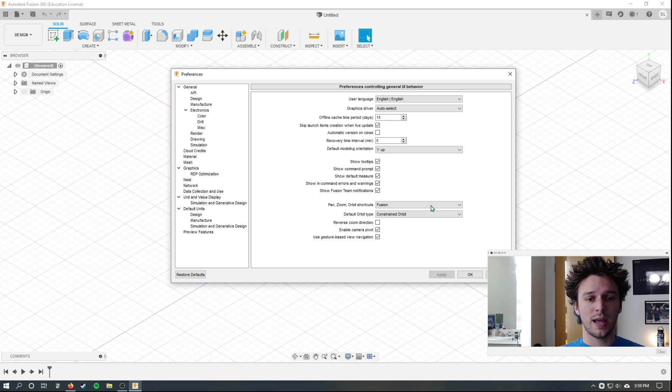It's really easy. In case you aren't logged in, or if you're on a shared computer, you can go up to this button at the top right, and that is where you can sign out and then sign into your correct account. And also preferences are from that button as well. This is where you can set things like your default modeling orientation, the type of orbit you like, your shortcuts, anything like that. But just in case you need those, that's where you'll find them.

So what we're going to do is we're going to create a crank with generative design. And generative design is really interesting because it uses reiterations of AI software to create a model. And so the way that it does that is it uses constraints and preserve geometries and obstacle geometries. And those are how you define what you want to keep in it and what you don't want it to kind of grow into. You can kind of think of it like vines creeping along.

And they're going to grow and create a path that is both strong and lightweight, and you're preserving materials, and you can change it based off of the material type you're using. You can put different types of loads on it. There's a lot you can do, and we're going to be exploring all of that.

But the most important thing about it is that it is unpredictable. And so that is why we are going to be very careful when we're setting it up, because you can get results that you are not expecting, but technically may be correct, but they aren't exactly what you want.

So the very first thing we're going to do is just create some bodies in Fusion, which are going to be our obstacle and preserve geometries. And basically what that means is we're going to create the stuff that we tell the AI, I want this kind of form to be in the final generative design, or I do not want it to go into this

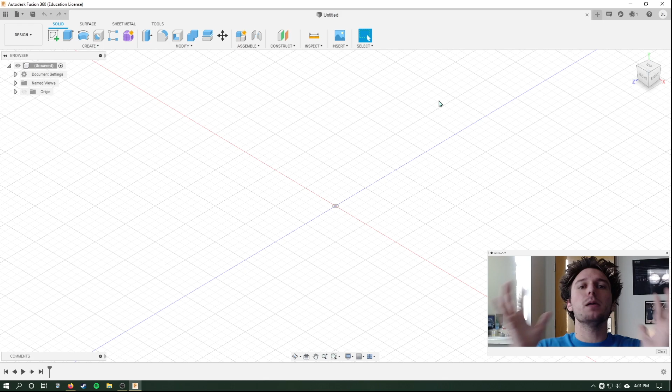And so we're going to be creating a simple square drive crank. And this is completely arbitrary, it's not being used for anything, but this crank is something that we are going to just define the bare minimum of, essentially. And then we're going to let the generative design do its thing, and then it's going to create this kind of finished product for us.

And so the first thing we're going to do is we're going to open up our data panel with this button, and this is where you're going to see all your different projects. And so you're going to go ahead and click this blue new project button, and you're going to type in a name for this. So it could be generative design tutorial, it could be a class name, it could be whatever you really want.

But since I already have a generative design tutorial, I'm going to go ahead and go into there. I'm going to close that panel so we're inside there, and then I'm going to hit this button and new design. And realistically, we don't have to do that because we already had that tab open, but it's just in case you accidentally clicked any buttons, whatever it may be.

So we are looking at our blank workspace, and in this area you can see the layout grid. If you don't see it, you can go down to here, which is the grid and shapes button, and you can turn on the layout grid with this check mark. I like to have it on when I'm starting at the beginning.

I might turn it off later, but I like to start with it because otherwise, when I'm just looking at it like this, I cannot figure out what I'm looking at. It's just blank. And so this layout grid lets me orbit around and get some sense of where I am in space. And we're going to use the view cube up here to return to our home view, which is just a nice isometric view.

So if you are orbiting and you're not exactly sure why it's getting all spinny, see, like this is getting all angled, that may be because you have the constrained orbit off or on. And so we're going to go ahead and switch that to constrained orbit, and we're going to go back to our home. And now as I'm orbiting around, you can see it kind of keeps a vertical, almost. And so that's just for, I guess, sanity.

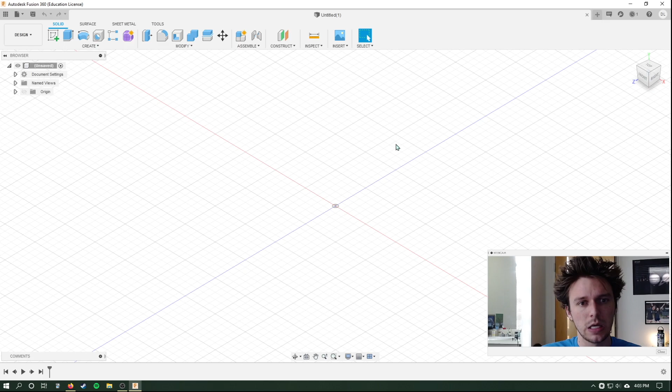But once I turn off the grid, usually later in design, I might turn off that constrained orbit, so that way it's a little bit more freeform and I can get to places that I want really easily. Just some things to keep in mind.

So the very first thing we're going to do is we're going to define a sketch, just like in any CAD software. And so to do that, we're going to go up to the ribbon at the top here, and we're going to click the new sketch button. And we're going to do this on the top plane. And we are going to create basically the crank interface. As I said before, this is a square drive crank.

And so we're going to create that square drive. We're going to click on this top plane right here, and you can see the coordinates with the top. So now we're looking at the origin of the top right here.

The very first thing I'm going to do is create a square, because this is a square drive crank. But I don't want to do a 2-point rectangle, because that's defined by 2 outer edges. Instead, I'm going to do a center rectangle, so we'll click on the create dropdown, go down to rectangle, and do center rectangle.

Now if we just hover, you can see it gives a tooltip which says place center point. So we're going to go ahead and click on the origin right there, and we're just going to type in the dimensions that we want.

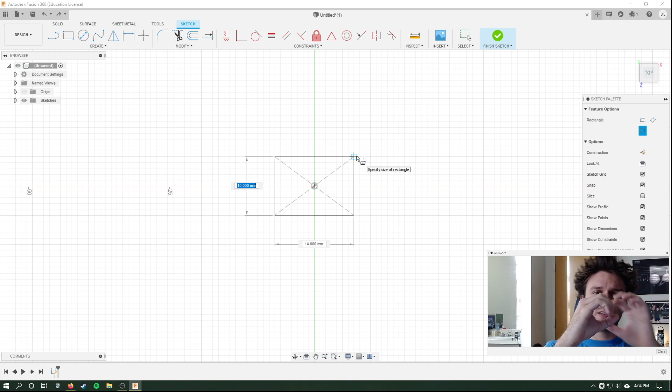However, what we're going to define this as is, we're going to imagine this is being milled from some 10mm stock. So some round stock like that is 10mm in diameter. We don't exactly know what that diameter is based off the height and width of the square, so we're just going to click arbitrarily.

And then what we're going to do is create a circle from the center point circle tool, which is just the default right there. This is where we're going to define that 10mm diameter. So let's go ahead and type in 10, okay?

And so now we want this square to kind of fit inside that circle. We want it to be inscribed in it. So what we're going to do is just drag one of those corners so it kind of fits in there.

And then all we need to do is click on this point, we're going to click coincident and click the circle, like that. And then we're going to do it with this one as well. Actually, that's over constraining, so we're not going to do that.

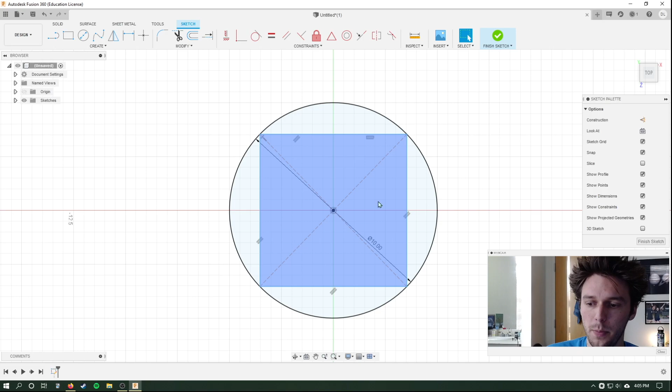But what we are going to do is, you can see that this isn't even — it's not defined as a square. So while, yes, the point is constrained to the outside of the circle, it's not considered a square, it's still a rectangle. So to do that, we're going to get an equal constraint, and we're going to click on the top and left edges of that rectangle, and now it is constrained as a square.

And you know it's fully constrained because it's now black, and if we try and drag on it, it doesn't move because it's locked. So we're going to go ahead and finish this sketch. And now that we've finished it, we can check in the sketch panel, and you can see it has a little lock icon right next to it. That means it is fully constrained, so that is a locked drawing. It's not going to just randomly change or confuse us, anything like that.

Let's go ahead and go back to home, and you can see this is our isometric view. And what we're going to do is extrude — you can either click this button, or click E, or click Q, which is the press pull tool, kind of an all-purpose tool. It doesn't really matter.

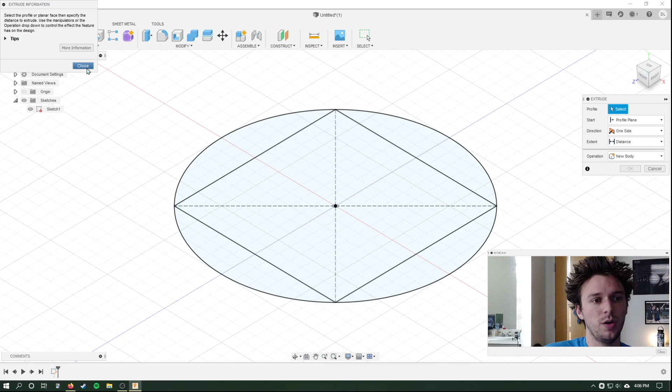So I'm going to hit E on my keyboard, and I'm going to hover over the square. You can see we can hover over some of these semi-lunar areas, but we're going to hover over the square, and we are going to extrude this by 10 millimeters. We're setting this operation to new body, and we're going to hit OK.

Let's go ahead, zoom out, and orbit around. You can see we have extruded this up 10 millimeters. So now let's go ahead and drop open our bodies in the tree over here, and let's rename this, because this is the start of our square drive. So let's rename this square drive, so we can keep track of it. Okay, so we've got our square drive.

And now we are going to create a revolve. This is kind of the plate that the crank itself is going to attach to, so it's the crank arm that we are going to use in the generative design. We are defining this preserved geometry, which is the plate that will interface.

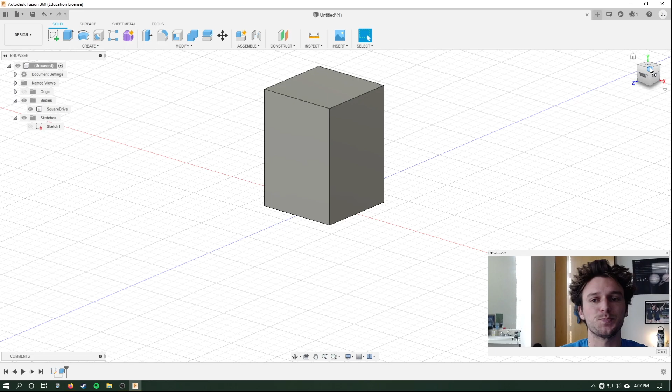It has that square drive, and it's also where we're going to bolt the arm for the radius of our crank. Let's go to create sketch, and we're going to create that plate on top of this square drive, from the front plane. You can see as we're hovering, it's highlighting this plane of the body we created. If you click and hold, you can say I want XY. So now we're creating a sketch on the XY, which is the front plane right here, XY front.

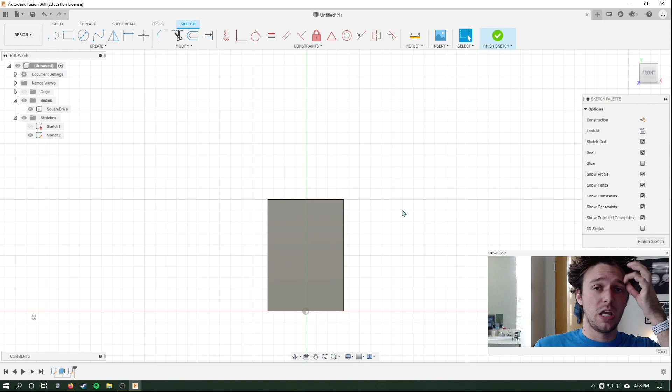So we're creating a sketch on the front plane, and the first thing we're going to do is, remember we're creating this from round stock, and we're kind of squaring off the end of the round stock. That may be something that's just given to us, like a supervisor says this is where it's going to be interfacing with whatever machine we're making, who knows.

But they're defining it as a 10 millimeter round stock. We already defined that circle as 10 millimeters, so we're going to recreate that in this sketch plane. To easily do that, we're going to project one of these edges in here. We'll hit P on our keyboard, or go to the Create dropdown, down to Project Include, and hit Project. We click that edge and create a projection link, which means it's going to continuously keep that there, and hit OK.

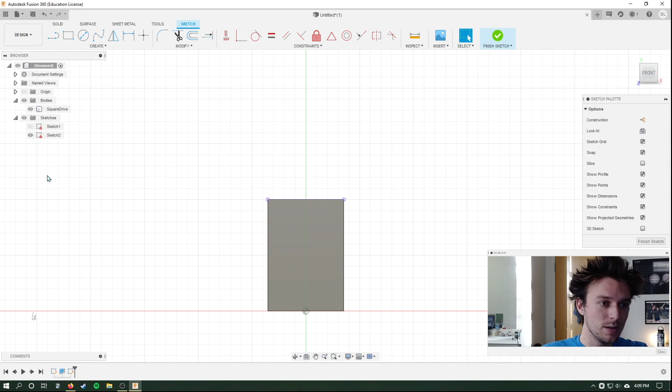So now you can see we've got this kind of purple line right there, and we can turn off the body if we want. You can see that line is now in our sketch plane.

Now we're going to go ahead and create a rectangle, and we want to do this as a construction because we're just referencing this. We don't want it to get in the way of our drawing of our actual sketch bodies. To do that, we hit X on our keyboard, and now I'm going to create my square, which we're just going to arbitrarily start from that point and then drag it somewhere. We'll use that coincident constraint to make this point coincident with that point. However, you can see it's not constrained yet because this is still orange, which means it's movable. So to create this as a full square, we're going to go back to that equal constraint and click these two edges, and now it's a nice square.

Then we're going to create a circle that encompasses that, because we want to grab that outer edge of the circle as our round stock. To do that, we're not going to do a center point circle. Instead, we're going to do a 3-point circle, which is a different type of circle defined by 3 points. We're still in construction mode, which is good, and we're going to define this by 3 of the points of the square—it doesn't really matter which ones. There we go, and so that is fully constrained. You can see if I try and drag on it, it won't move. So now we know this is our edge of the round stock, and that's where we're creating this plate out of.

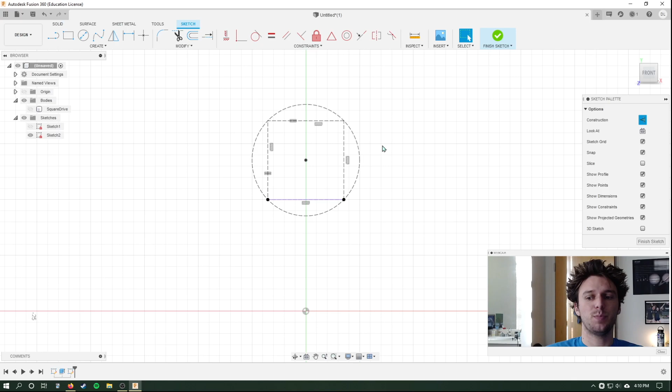And so we can turn that body back on if we want, visually. Now what we're going to do is connect it to this square drive. We'll go ahead and hit the line tool, or L on our keyboard, and we're just going to start here and move out.

Actually first, let's go ahead and create what we're going to revolve this around. To do that, we'll hit our line tool and snap to the midpoint, which you can see is indicated by that little triangle that snaps next to our mouse cursor. We'll turn off the construction tool by hitting X, so we're drawing regular sketch lines, and we're going to click on that midpoint and move up.

We're going to move up an arbitrary amount, doesn't really matter how much. Then we're going to move over to create the top face of that plate. We're going to move down, move over, move down, and then connect to this point.

So you can see a lot of it's blue, it's not constrained yet. That's perfectly okay. However, this is what we are going to revolve the sketch around to create this plate.

And it's going to join with that square stock to create our square drive. But we don't want this little underhang here, so we're going to click the horizontal vertical constraint and then click that line to lock it to horizontal vertical. You can see the rest of these are locked to horizontal or vertical because they have perpendicular constraints, which were created automatically, which is great.

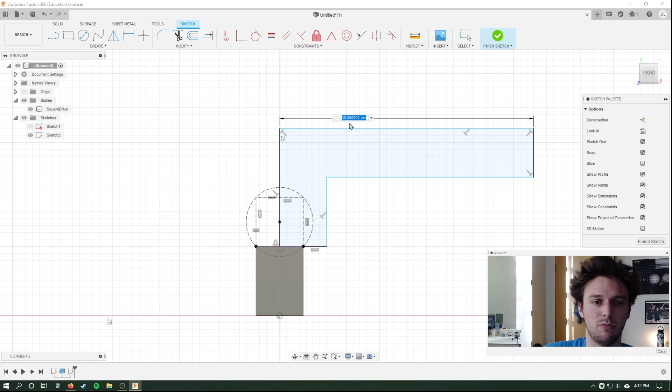Let's go ahead and define the radius of this platter, I guess is what we would call that part of it, as 25 millimeters. And so now we can just click and drag on stuff and see, okay, well, we can't move this out, but we can move it up and down. We can move this point still.

So let's go ahead and create this line as tangent to the circle. We're going to do a tangent constraint by clicking this line and the circle. So now we are tangent to the outside of that circle, which is exactly what we want.

And then let's say that we're creating this with a clearance, so it's going through a plate or something like that, and the square is intersecting with whatever it's cranking. But that plate, let's say it's 8 millimeters thick, which is this height right here.

So we're going to hit D on our keyboard. D is in delta for the dimension tool. Alternatively, you can click up here. And we're going to click that line and type in 8 millimeters.

Also, if you need to change your sketch or your project dimensions, you can go to this drop-down on Document Settings and click this button to change the active units to millimeters. But I'm already on millimeters, so I don't really need to worry about that.

All right, so now we can go ahead and look at this sketch. We've still got this blue line, which means it's free-floating. So let's go ahead and define that, and let's say that this platter is 5 millimeters thick.

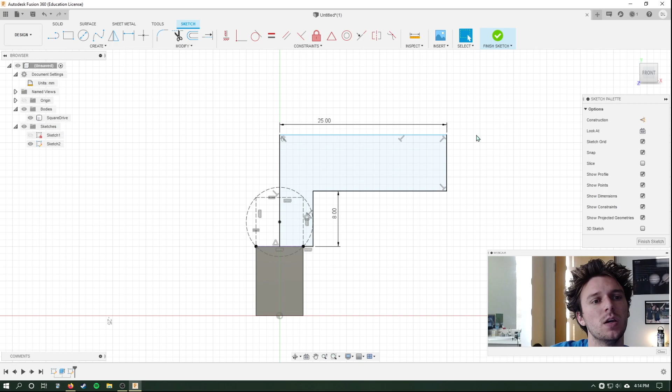So let's say that the crank's arm is going to have some probably M3 bolts or something like that that are passing through, and we want them to pass through about 5 millimeters of that plate. So we're going to go back to our dimension tool, and we're going to define this dimension as 5 millimeters.

Great. So it looks like everything is fully constrained, all the lines are black, and if we try and drag on something, it's not going to move because we have properly drawn this out. So let's finish this sketch.

And so now you can see it's kind of there, and you're going to understand why we did this circle as the outer constraint, because when we revolve it, that means this corner right here is going to kind of revolve around and perfectly touch that corner.

And we're creating that with construction geometry, and instead of just defining it as the number that it ends up being, we're doing this in a way that it can update. So it's kind of future-proofing our design. So let's say we ended up changing whatever this square was, maybe we wanted it to be 12 millimeters or whatever we define that as. If we end up changing that in the future, then this will update automatically, which is really great.

So let's go ahead and create a revolve by clicking the revolve tool. It's going to default to the last sketch we had selected, which is great. If it doesn't, you can go ahead, hover over it, and you can see it selects it all.

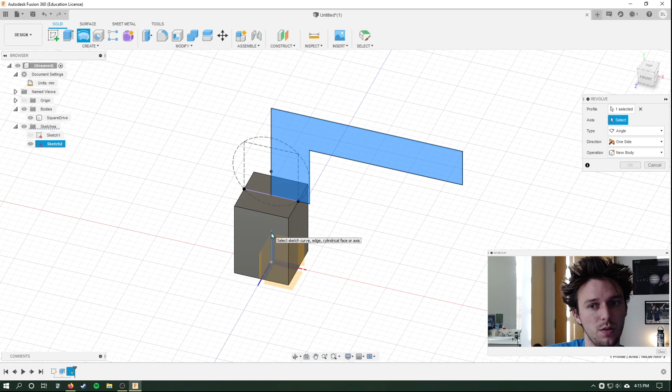And then our axis that we're revolving it around, you can either choose one of the lines or you can choose the y-axis in there, but we're going to just choose this line. You can see that it's revolving this around. And so as we just take a glance at this, you can see that it's perfectly touching.

And so now you can see how this kind of round stock was kind of shaved off to create that square. And we're just going to make sure this is set to join, so it's going to join this revolution with the square that we made, and hit OK.

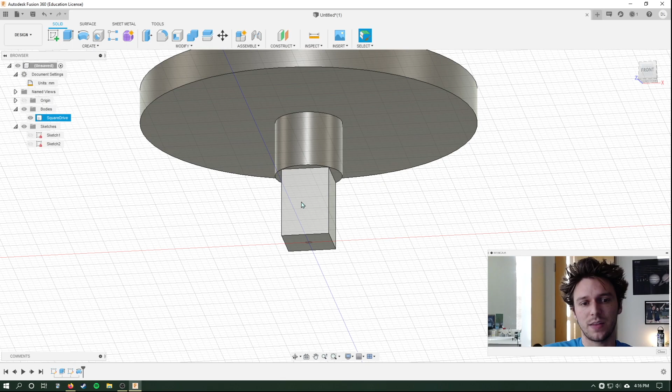So now we still have one body, and it's this whole thing. You can see it's kind of this platter, and it's got this cylindrical area where it's going to be passing through a plate or something like that. You can almost think of that as the bearing surface. And then we've got the square drive. So let's go ahead and look at the isometric home view.

And now we need to create the holes for the bolts. I said that it's probably going to use M3 bolts. So let's go ahead and create a sketch on the top surface here. We're going to click the sketch tool and click this top surface. And there we go.

Oh, and this is actually a great example. If you ever lose your orthographic view or whatever you're looking at for your sketch, and it's not one of these cardinal planes, you can click this look-at button and click the face that you were looking at, and that'll fix it. But we happen to be doing this on the top plane, so I can just click top, which is nice.

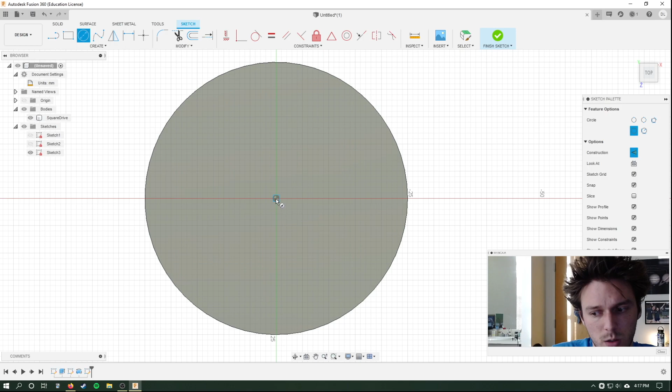So let's go ahead and create the hole profiles that we're going to extrude through this plate. We're going to create a center circle, and turn on construction. And we are going to create this with a radius of 17.5.

This is something that's going to be defined either just something that we choose arbitrarily, or maybe it's a constraint that's already been decided on, whatever it may be, but that's just what we have. And then we're going to go ahead and create this.

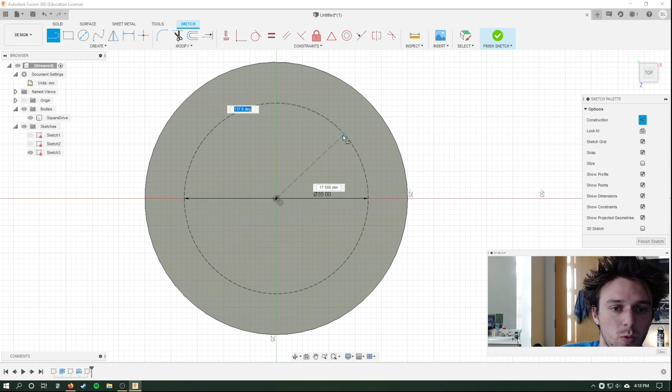We want these to be in a square formation like this, so we need to set a 45-degree line right there to constrain us in that. We're going to hit tab on our keyboard to get the degree measurement, and you can see it's measuring from this line right here, so that would make this 135, but we're going to define that later. So we're just going to click, and when we see the little X on the circle there, it's arbitrary. You can see if we drag this, that is just a line that is constrained to the outside of that circle. So let's go ahead and dimension this.

To do that, we're going to need a line to measure from. So we're going to hit L on our keyboard, and this one is going to be nice and horizontal. You can see it grabs that horizontal constraint, kind of behind the 35 there. So let's hit D on our keyboard, and click these two lines to create a 45-degree constraint. And now we've got that 45-degree constraint.

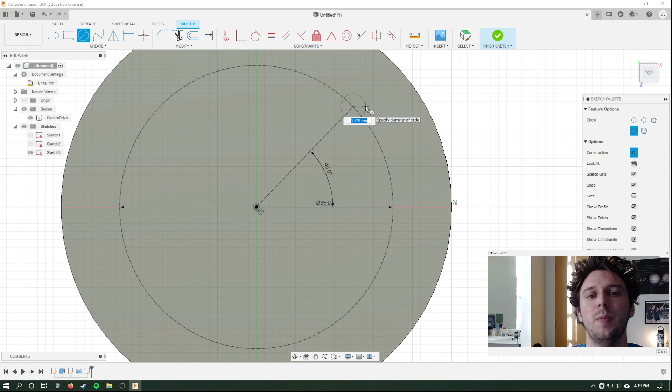Now we can create a circle right here at this point. To do that, we're just going to hit C on our keyboard or click the circle tool right there, and this is from center and diameter. This one, we're going to pretend like we forgot to turn off the construction. We said M3, so we're going to do that with a 3mm nominal diameter.

To fix that, all you have to do is click on it and hit X, and that will switch it to a sketch line. Then we want 4 of these, so we can either do 2 mirrors, which would require a line here to mirror it across, or we can do a rotational pattern. Circular pattern is right there under the create dropdown, and it's asking for our objects. So let's go ahead and pattern the circle, and the center point is going to be the center point of this drawing, and we don't want 3, we want 4.

However, you can see it's actually showing us that these are dotted, which means that they're going to be construction, and I don't want to have to go click on each one to change them. So let's fix that by turning off construction first.

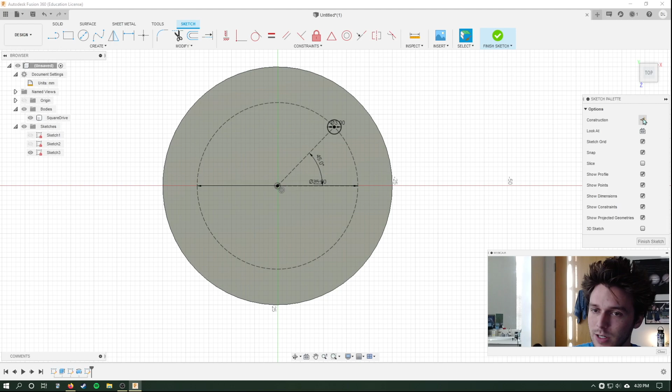And let's go ahead, click that circular pattern, and now it's asking for our center point. We're going to click there. And let's just go ahead and change that to 4. And you can see that they're kind of vaguely shown right there. They're not fully drawn in yet because that's just the preview. If we hit OK, now we've got all 4 of those circles, which is great.

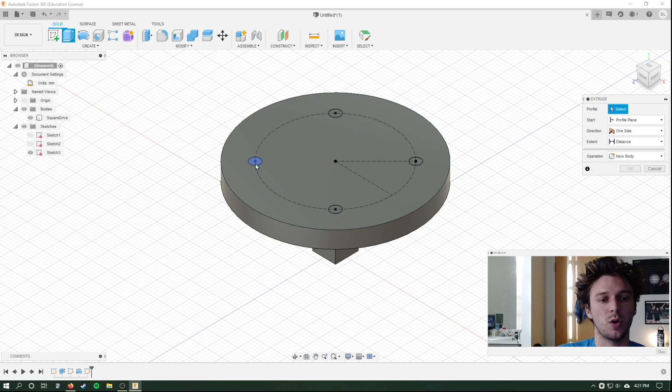So let's go ahead and finish this sketch. And so now we've got this sketch on the top surface of the plate. And let's go ahead and extrude through. So we're going to hit E on our keyboard, and we're going to select each of those bodies. And we want to extrude this through the plate. And so let's just drag it down.

And remember how earlier we were talking about creating it so it's kind of future-proof? Let's say this platter got thicker than 16 millimeters, which is what we just happened to drag it through by. It's not going to cut all the way through. So let's go ahead and set this as a to object. And the object we're going to do is this bottom face of the plate.

And you can see now they just automatically snap to the bottom edge of that plate. They're showing in red, which means they're cutting, and you can make sure they're cutting right there. We hit OK, and now we've got our holes in our plate, which is exactly what we were trying to cut.

Cool, so now the next thing we're going to create is a new body. And the reason we're creating this as a new body is because it's going to be the preserve geometry, which is the geometry that we want for the connection point for the bolts that are going through the arm. And so remember, we have this square drive here, and the arm is going to be coming out like that, and the arm needs to connect to those holes. So we need almost like built-in little washers is how you can think of it, for the machine bolts to pass through to attach to this platter.

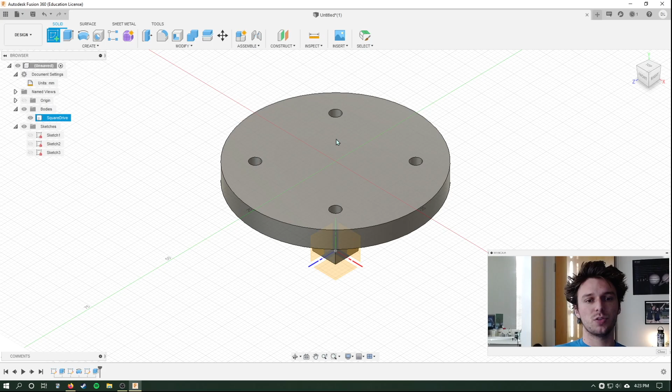However, to do that, we're going to need to create this preserve geometry. And so it's going to be a new body, and they're going to be what I call little feet. And so there's going to be one over each of these holes. And so let's go ahead and create a sketch on the top surface of here. So this is a new sketch. We're going to choose that top surface.

And let's look at this top right circle. And what we're going to do is we're going to hit P, so that way we can grab that edge. So P on our keyboard. And if we click that circle, we're going to create a projection link. Projection link also just means that it's going to update if we change that in the future. And so now we've got that circle, we've got the center of it, and what we're going to do is create the foot. And so to do that, we're going to hit our circle tool, start at the center, and we're going to go out.

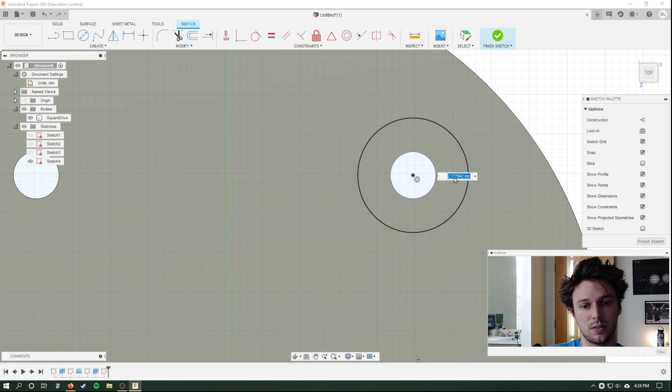So we're going to go out an arbitrary amount. Doesn't really matter how far, but what we're going to do is define it as a distance from the edge of this circle. So let's say we want it to be 3 millimeters in radius from the edge of that hole, just to give it some heft. And so to do that, if you try clicking D and doing this, that is going to give us exactly the distance we want. And so we're going to hit 3. There we go. And now we've got that circle.

Finish our sketch. We're going to look at it, and we are going to go ahead and extrude it upward. So let's go ahead, hit extrude. And we're going to hover over this, select it, and we're going to extrude it up. Now, it's going to default to joining it because it's touching this bottom platter, but we don't want to do that. We want to create a new body. And we're going to extrude it up 2 millimeters. And let's go ahead and hit OK.

So now we've got one of those little feet, but let's give it a little bit of distance off of the top. And so to do that, we're just going to extrude off of the top of this surface. So let's create a sketch, click on there.

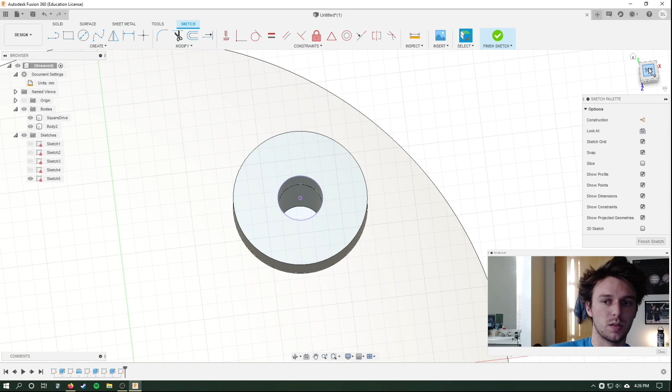And again, we're going to project that inner circle. However, let's project this one, which is the top of the platter, not the top of this. There we go. We're going to hit OK. And let's go back to our top plane. There we go. And so now we've got that circle there.

We're going to go ahead and create this 1 millimeter from that circle. So we're going to create an arbitrary circle. We're going to dimension it 1 millimeter. There we go. Finish our sketch. And now we can click that, hit E on our keyboard to extrude this up 3 millimeters. And we set that to join by automatic. It automatically did that. It's going to join it with the body it's already touching. So we're going to hit OK.

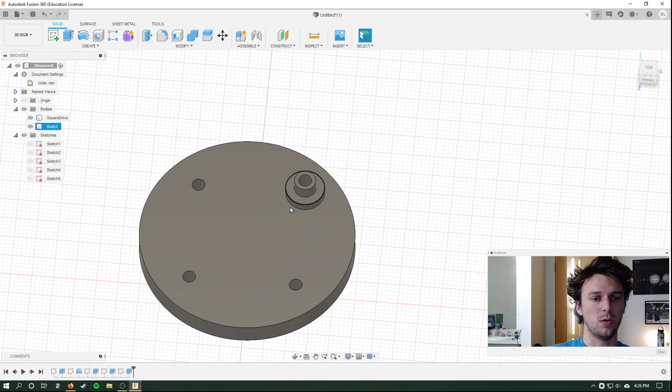So now let's zoom out and look around. We've got one object, which is the square drive, which is kind of combined with this little platter, plate thing, you want to call it. And then we've got this body 2, which is what I'm calling the foot. So let's rename that by double clicking. We're going to type in foot 1, because that is our first one. Actually, we'll just call it foot, because I think when we pattern this, it'll give it numbers.

And we're going to create a pattern so that there's 4 of those, and we're just going to do a circular pattern. So let's go to modify, oh, sorry, my mistake, create, and then we're going to do the pattern tool, a circular pattern. The type is the body, and then we're going to revolve it around the y-axis. So we're going to hit select and click that y-axis, and you can see it's defaulting to 3. We're going to make that 4. We're going to hit OK. There we go. So now we've got each of the feet as different bodies.

And so those are our preserves. We want the arm of the crank to, remember thinking of it like vines growing, grow into those so they're connected. Those are part of the preserve geometry. Our bolts are going to run down through those. These are probably going to be clearance, so that's why they're 3 millimeters. And then we would probably thread in this platter right here, so that way the bolts can bite into the plate. So there we are. We've created the feet.

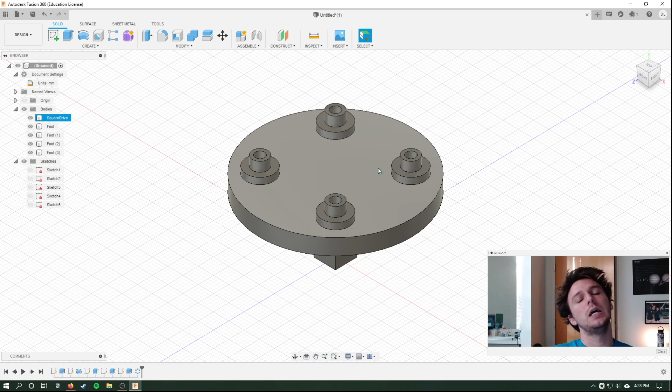And now the next thing is we are going to create the spindle for the crank, the spindle inside the handle that we are going to turn. To do that, we're going to lift it off this surface a little bit. So we're going to look at our front plane. When we draw this, we want it to be probably 5 millimeters or so from that surface. So we're going to use a different method. We're going to create a construction plane, an offset plane, which is just the default, from that top surface, 5 millimeters. And so now we've got another little plane floating in space, and you can see it's floating above that if we're looking from the front plane.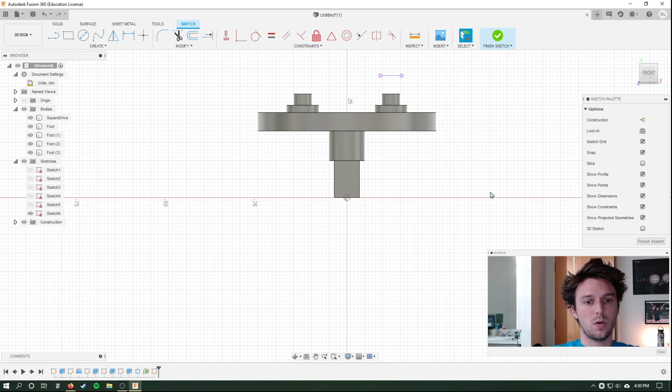So let's create a sketch on this front plane. We're going to hit the Create Sketch button and choose the front plane, which is XY. And let's project in that offset plane we created. So we're going to hit P on our keyboard, and we're going to click that plane. And so now you can see it's just kind of in there. We're just going to use this as a reference. And so for that reference, let me move over.

We're going to imagine the crank is right here. And let's say we wanted to have a radius of 200 millimeters from the square drive. So let's create a construction line. We're going to hit X on our keyboard before we draw, and we're going to make this 200 millimeters long. So that is our radius right there. Then we're going to need to go up, because we want this to be at the same height.

And so to do that, we're going to go up like that until it snaps, and you can see we get this blue line right there, which is showing that we're at the same height as that, which is great. And we can double check that that actually worked.

Oh shoot, it didn't. So to create a construction constraint to make sure that it's locked in there, we're going to hit L on our keyboard, and we're just going to create a construction line to there, and then we're going to make sure that that is stuck at horizontal. There we go.

So now you can see this is 5 millimeters above that top surface where the bolts are, and this is 200 millimeters away from the center of the square drive. And so that is our 200 millimeter radius for that platter. Okay.

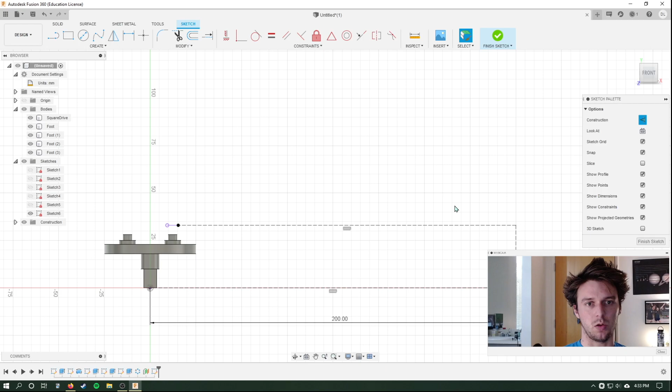So what we're going to do is create this spindle for the handle. Oftentimes cranks will have a free-floating handle, which allows your hand to pivot around that crank, and that's because as you're rotating it, it's going to rotate relative to your hand as you're orbiting the center of the drive.

So we're going to create a round spindle, and to do that, we're going to create a revolve, and we're going to revolve this profile. So let's go ahead and create a line, turn off construction, and let's say that this spindle for the handle is 100 millimeters long. So we're going to go up 100 millimeters. Great. Now, let's move that dimension out of the way.

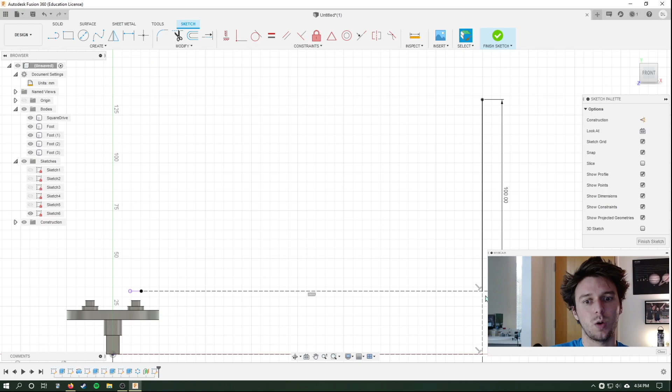Now, we are going to create the rest of the revolve. Let's say that the spindle diameter is 10 millimeters. If it's a diameter, then we're going to need a 5 millimeter radius. So we're going to hit line, and we're going to move over 5 millimeters. There we go. And then let's move that out of the way. We're going to zoom in up here.

Oftentimes, if we're using, let's say, an ABS handle around a stainless steel spindle, the spindle will have a little groove in it with the handle having a little plastic nub that snaps on over it. That can be created using injection molding or whatever process. But we're going to create that little groove. This is all part of the preserved geometry for that spindle, and the spindle is attached to the crank arm.

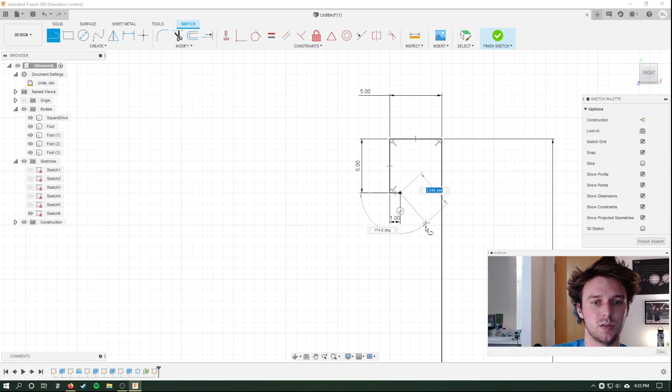So let's move to our line tool by clicking L. We're going to go down 5 millimeters, click, and then create that notch. Let's say it's 1 millimeter deep, so we're going to hit 1. We're going to make sure that that is nice and perpendicular, and then make sure that we've got some room for that notch to wiggle a little bit, so we're going to make that 1.5.

Then we're going to go back over, and you can see that that's actually a little overdrawn, which is fine. Let's hit that check mark, and make sure that this is the correct distance, because you can see that this does not have a distance. So we're going to go to the vertical constraint, click this dot and this dot right there, and you can see that they are now vertical compared to each other.

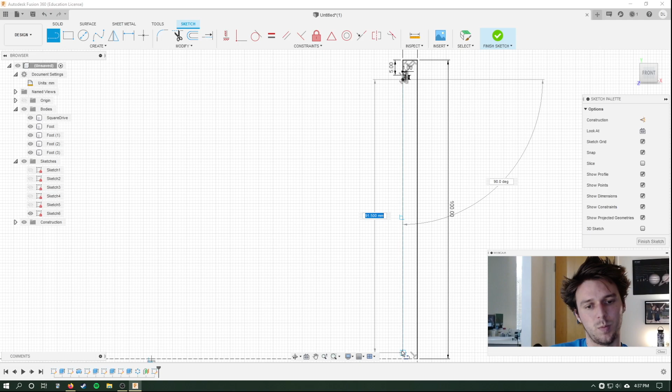Then we are going to go all the way down. So let's get our line tool, grab that point, and go all the way down. Let's say we drew it over a little bit, which is perfectly fine. Let's hit escape. Let's close this. And we're going to use the trim tool by clicking T on our keyboard, and you can see it highlights red where we're going to erase that little bit.

There we go. Then let's say we also wanted that notch. Oops, I used the wrong orbit. We are doing this on the front plane. There it is. Let's say we also wanted that notch down at the bottom of this handle, so it's got 2 notches. That way we're making sure this plastic handle is not going to fall off this spindle.

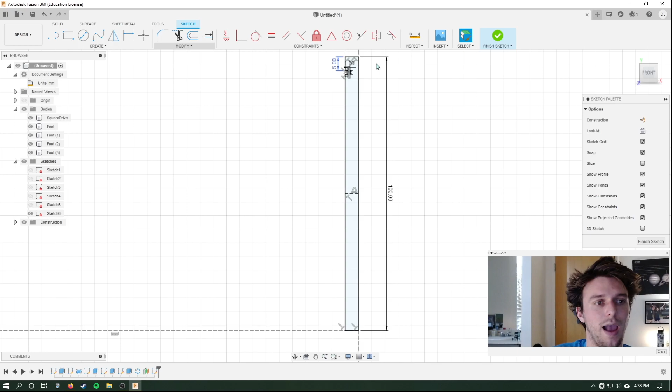And so to do that, we can just kind of mirror that geometry. And so to do that, let's create a midpoint line along the midpoint of this line. Just like that. And we don't want it to be an actual sketch line, so we are going to click that line and hit X, and that will switch it to a construction line, and then we are going to zoom in here. We're going to select, by holding Shift, those 3 lines, and you can see they're highlighted blue.

Then we are going to mirror that across this line, and you're going to see it's going to show, oops, this is actually a good example. We accidentally selected that line as something we are mirroring. We don't want to mirror that. So let's undo. We're going to zoom in here, reselect those by holding Shift, create our mirror, which you can go down to here or it's at the top.

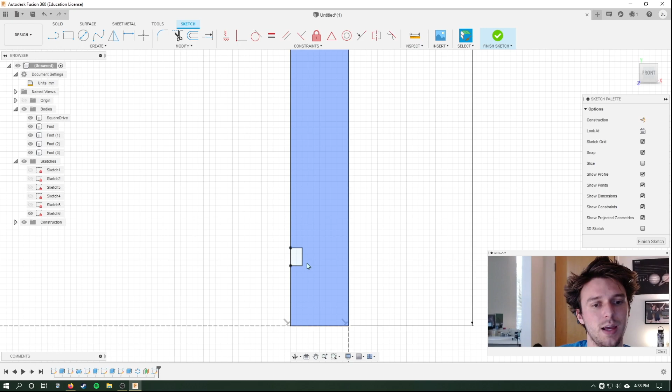There we go. And so now we've got this new body, which we can rename spindle, or I guess you could call it almost like a pin. So let's call it the handle pin. Cool. So we've got our handle pin, and you can see that that is kind of the radius that we wanted, which was 200 millimeters away.

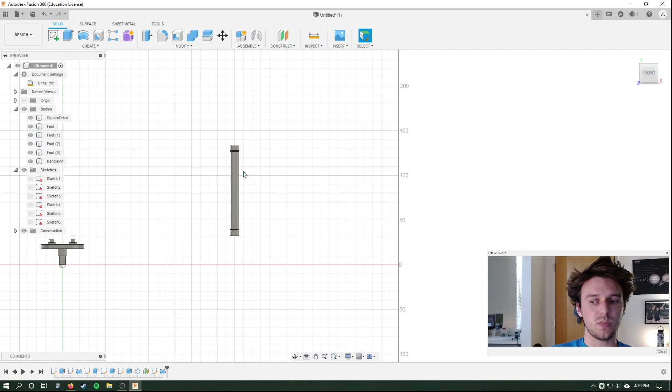And when you're putting the handle on to this pin, you want it to be easy to get on. And so to do that, we're going to go ahead and just chamfer this top edge. We can go up to the modify and hit chamfer, hit that edge, equal distance, and let's chamfer it 1 millimeter. Whoops, I deleted the decimal. There we go, 1 millimeter. So just a little chamfer on there. There we go.

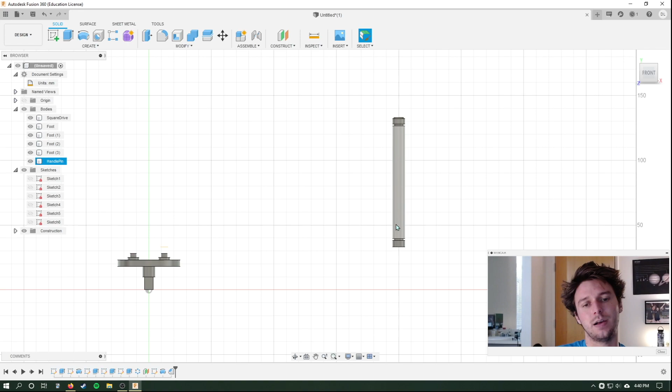So the next thing we're going to do is create the handle itself. And so let's say that this is a stock handle that we have just laying around that we're going to be putting on there, or maybe it's a custom handle that we're going to 3D print or whatever. We can either create the handle itself, or since it's what we're going to grab and we don't want any of the generative design to grow outside of this body, we can just create that handle as an obstacle geometry, because we don't want any of the arm to be in there. And so we're just going to create a super simple obstacle geometry.

And so let's go ahead and create a new sketch in the front plane, which we were already looking at. That's okay. And we are going to project this edge in there. So we're going to hit P on our keyboard. We're going to click that edge. We're going to hit OK, and now it's in there. Then let's go ahead and project in the top edge as well. So we're going to hit P on our keyboard, grab that top edge, and hit OK.

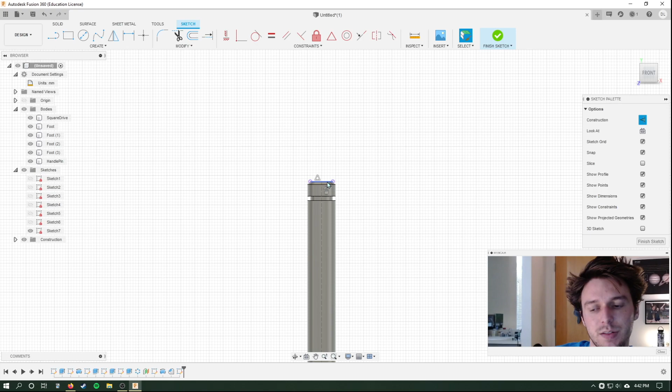So now we can create a midpoint line to revolve this around. And we're going to do that with a construction line. So we're going to turn on construction, hit line, and we're going to go to the midpoint there. And we are just going to go all the way up to there and snap it in. There we go. So now we've got that line in there, and let's create this with just a little bit of an offset. So let's create it with 0.5 millimeter offset. So we're going to go up by 0.5 millimeters.

And then this is where we're going to start creating that handle preserved geometry. And so we're just going to make it really big and blocky. It's not going to be pretty. It's going to be strictly for obstructing the growth in the generative design. So we don't want any of the software to think that it can kind of grow up into that handle, because that is going to be where the plastic is.

And that growth is all the arm that we're going to create with the generative design, and we're going to manufacture it, maybe do some laser sintering or something, who knows. But I'm assuming it's going to be metal. Let's go ahead and turn off construction.

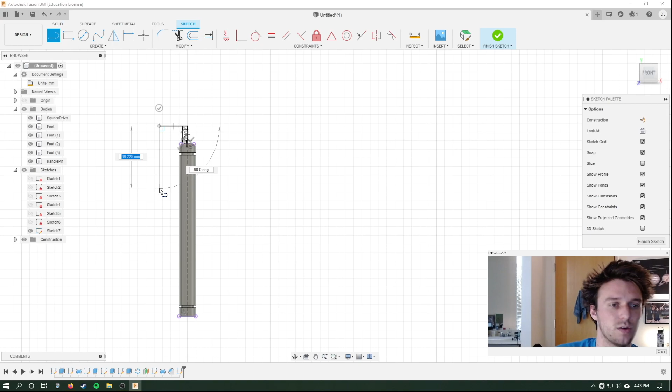We're going to start a line. Let's go up, let's be generous and hit 10 millimeters. Then we'll go over, doesn't really matter, enough to gather basically the whole handle. Actually, let's undo that line. We're going to go over a little bit more, let's say 25 millimeters just to be safe.

There we go. And then we're going to go ahead and go down, and then finish that. And then we say we want the same 0.5 millimeter offset, so we're going to do the construction line, and we'll go 0.5 millimeters. Hit OK, but we need to actually type in 0.5. We're going to hit D on our keyboard, 0.5, perfect.

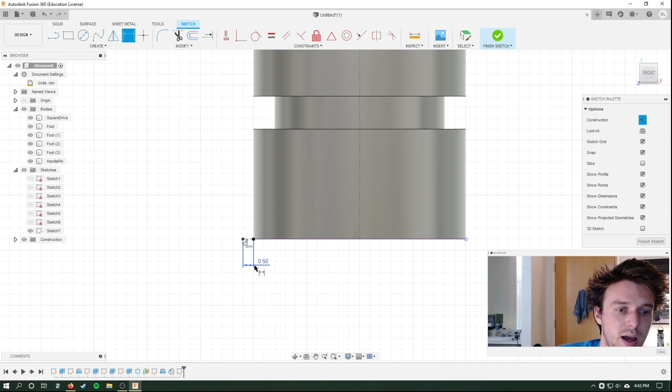And then we are going to create this line, connect it to that point. And we don't want there to be construction, so we're going to click on it, hit X on our keyboard, and then we're going to constrain this to horizontal. Perfect. And then the last thing we need to do is go up and reconnect to where we started. So we're going to hit L on our keyboard, connect there, and you can see we're still doing construction lines, so let's fix that. There we go.

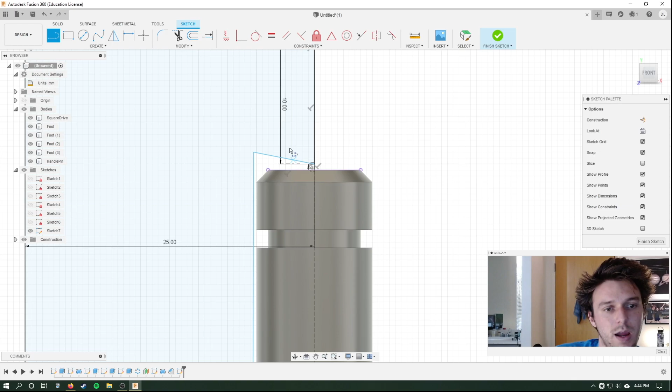L on our keyboard, and we are going to go up. Let's keep it perpendicular, and we're just going to connect to there, and let's go ahead and constrain this to be horizontal, and that to vertical. There we go. So we have created this, and you're going to see we're going to revolve it around.

That's just going to be this big chunky handle that is going to be an obstacle geometry, so none of the generative design will grow into it, which is good because we don't want it to think that it can grow in there, because that's where our handle's going to go.

And so let's go ahead, let's revolve this around. It's defaulting to the last thing we drew. Let's grab that axis, which is that construction line right there, and hit OK. And so that is a new body, which is this one, and we're going to just call it the handle. So we've got the handle, and it is revolved around the handle pin, which is right in there.

And we are going to go ahead and hide the handle just so we can see a little bit more what we're doing. Then the last thing we're going to do is create the kind of upper and lower bounds of where we want this to grow. Because remember, we kind of want it to grow like that.

We don't want it to grow into the bottom here because we've got the plate that this square drive is going through. And we don't want it to grow up, because if it grows up here, you can imagine our hand is on this handle, and as we're cranking it, we would hit it if it were growing up into here, because the human operator's arm is going to be on that crank, and you could hit it right there.

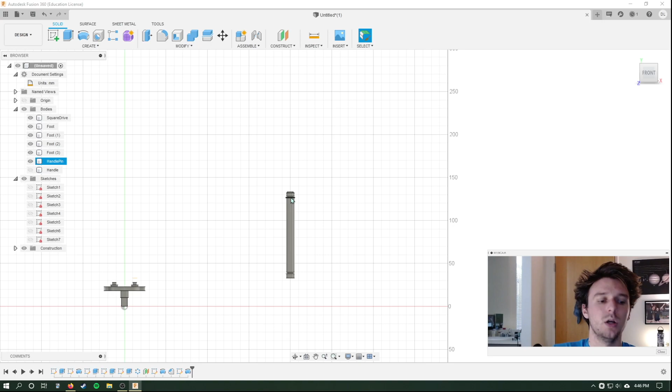So we need to create two kind of obstacle geometries, and we want to make these just super simple. So one of them is going to be a nice easy square, and the other is going to be a cylinder. So let's go ahead, go back to our isometric view, and we can turn off that construction plane right there by going to construction, turning off that plane, because it's just getting in the way now.

And let's go ahead and create that plate. So like, let's say this machine is in a box or something. This is the edge of that box. And we're going to create a sketch on the bottom plane.

We are going to do it as a center rectangle, but it doesn't really matter, we're just going to make it completely arbitrary. We just want to make it enough that it is outside the handle, because it's not going to grow anything out past it - that's just excess geometry. It's not going to be helpful, it's just going to add weight.

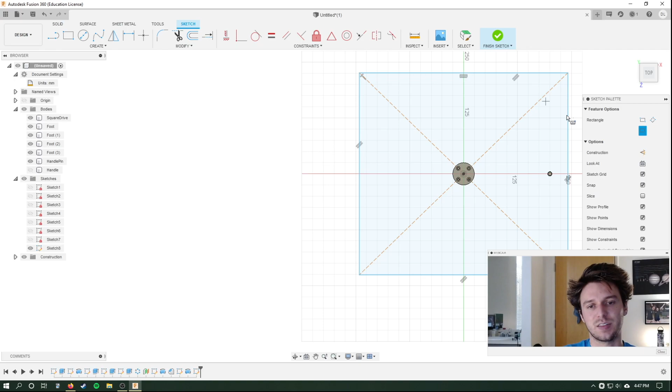So this is just enough that it's not going to grow down anywhere. We're just going to finish that sketch, keep it unconstrained, completely arbitrary. Then we're going to extrude it up. Again, we don't want to make this a permanent distance, we're not going to define it because we want this to update.

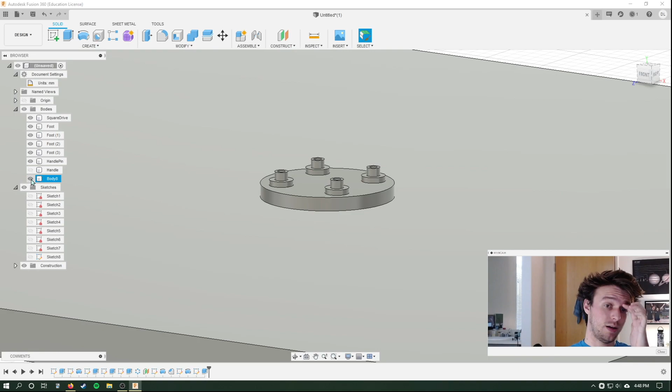We're going to change this to object and select this face right there. We don't want to erase that because we're creating this as a new object. So we're going to change the operation to new body, hit OK, and you can see it didn't affect that square drive at all. We're just going to call this the plate.

If we look from the front, you can see that it's a perfect join. It doesn't really matter because this is just setting up a restriction - we don't want the crank, or the crank arm, to go in there.

The last thing is we are going to create another arbitrary sketch from the front, because it's going to be a revolve. This is where our arm is going to have clearance, because if this grows, it's going from here and grows up like this. If it's up in here where our hand is holding onto this handle, our arm, like our ulna or something, is going to bash right into that - it's going to hurt. So we want to keep this nice and restricted into a nice tight area right here.

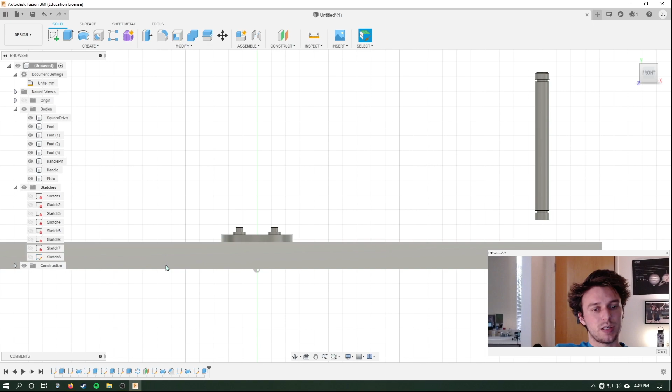So let's create a sketch, and let's turn on the handle again. Let's create a sketch on the front plane - remember, we can click and hold to make sure we're choosing the XY plane. This is going to be just a nice arbitrary sketch.

So let's create a construction line going up from the center, hit OK, and then turn off construction. We are going to go all the way over to the handle to make sure that we are kind of protecting everything.

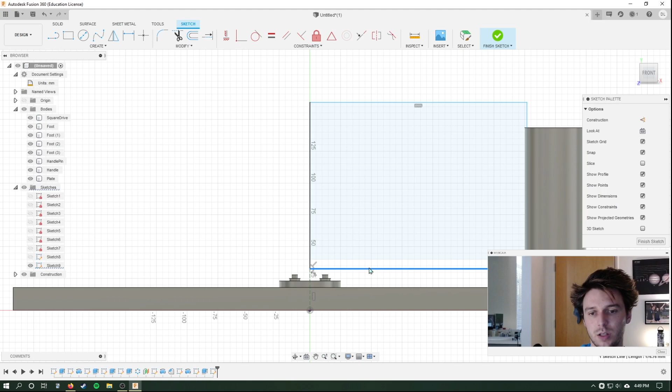Let's go ahead and make that horizontal. Since this is arbitrary and we're not defining anything, we can just kind of drag this down until it's pretty close - it doesn't have to be perfect. But basically, we are now going to revolve this.

If we hit finish sketch and revolve the axis - let's cancel that just to make sure we're doing this correctly - that's our profile, the axis is there. We're not cutting, we're going to make a new body. Hit OK. This body we're going to call arm clearance, because we don't want to hit our arm, so that is clearance for our arm.

If we look from the front, let's turn off the handle, we can see that it's going to grow down and it's going to be stuck in between these two, because we're going to set them as obstacle geometries. And it's going to connect to these little feet. That is the basic setup of all the bodies we need.

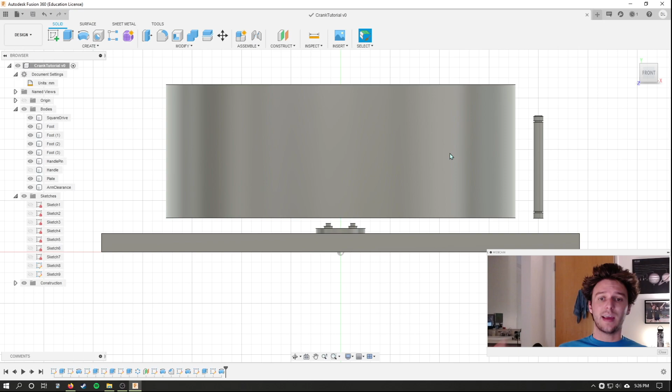Now that we have created all of the bodies, what we're going to do is first save our design. So let's go ahead, save this, and we're going to call it crank tutorial or something like that. Hit save. Now that is saved, and you can see Fusion versions - so now we're in version 1.

We've created all of our obstacle geometries. However, there are a few more that we need to think about - if we hide this arm clearance, these are kind of the standoffs, remember, for the bolts which are going through. So the bolt is going to come down and insert into here, and this plate would probably be threaded or something like that.

We presumed M3, but that means there's going to be a head of the bolt which we need to make sure has clearance. However, instead of modeling that and modeling those threads and everything like that, we're going to use something called a primitive. Primitives are something that we can create in just the generative design environment - they're not actually part of the model or anything like that, they're just kind of in this little subsection in the generative design, which is pretty neat.

So let's go ahead, let's turn back on the arm clearance and the handle, and let's go back to our home view so we can see everything like that.

And now we're going to go into the generative design. So to do that, we're going to change our design workspace right here from design to generative design. And so now we are looking at the generative design workspace.

You can see we are now in load case 1. What we're going to do is think of different situations this crank could experience. For example, someone doing a regular cranking, or putting the handle on while the crank is attached, or taking the handle off, or maybe cranking backwards. We're going to think about these different situations, and each is going to be a different load case. Those can be complicated - you can have different forces in each load case, multiple forces, just one, or a bunch of different things.

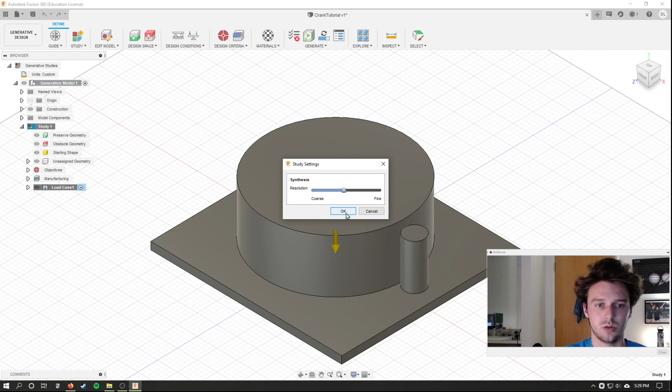So when we're working in generative design, basically we're gonna work left to right along the ribbon. The very first thing we're going to do is create those primitives that I told you about, which are going to be stand-ins for the bolt heads and the shafts.

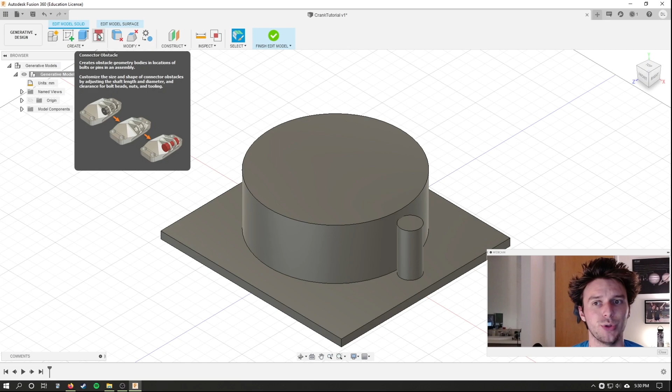We can customize the size and shape of connector obstacles by adjusting the shaft length and diameter and clearance for bolt heads, nuts, and tooling. That is exactly what we want.

So let's go ahead and drop down the model components and the bodies, and let's turn off the arm clearance just so we can see this. Let's go ahead and click connector obstacle. Let's also turn off the plate. It's going to ask us for the start of the shaft and the end of the shaft.

So let's go ahead and choose the start of the shaft as this hole right there, and you can see it's kind of creating it right now. We're going to do the end of the shaft as the bottom edge of that hole. So you can see it's just got a pin in there.

But because we're making a bolt, let's check bolt head, and you can see it's creating a bolt head right here. So let's go ahead and make it maybe 3 millimeters tall and, oh, what the heck, we'll say 6 millimeters in diameter. And that's just to give us room for the bolt head.

And we can also create tool clearance if we want as well. So that's for like our screwdriver coming down in there. And for the screwdriver, I mean, we can just kind of make that a little bit thinner. So there is our bolt.

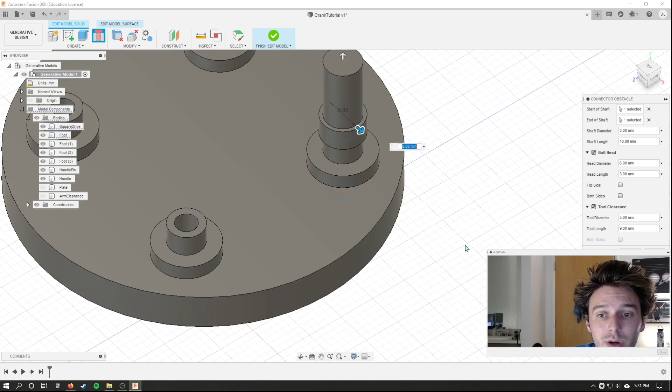And we don't need to worry about the back side of it because the plate is going to be back there, and so that will be our obstacle geometry. But we've got the bolt head. If you wanted to do it on both sides, you can, but we're not, since it's kind of threading into the plate - it's not using a nut on the other side.

So we're going to hit OK, and we're going to remember 3, 10, 6, 3, 5, 9. Actually, I'm going to write that down. 3, 10, 6, 3, and 5, 9. And we're going to hit OK.

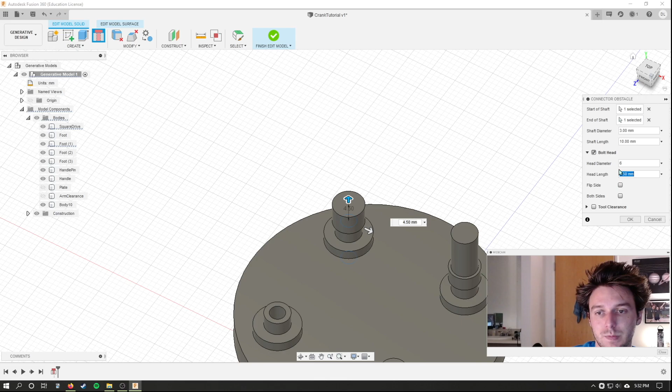And now we're going to do that again. We are going to start the shaft there, end the shaft there, and we're going to do a bolt head. We actually don't need to remember the 310 because that's just defined by choosing the geometries. Then we're going to do 6, 3, and then tool clearance. It's 5 and 9. There we go. I'm going to go ahead and do that 2 more times.

Okay, now I've created the 4 bolts with their little tool clearance, and you can see we've actually got those bodies here. So we've got body 10, which is bolt 1, body 11, which is bolt 2, body 12, and body 13. We can rename those if we want, so we're going to call that bolt 1, bolt 2, bolt 3, bolt 4. So we've got our 4 bolts, and remember you can see those are going through. We've got the threads going through right there, we've got the head of the bolt, and then we've got the kind of the screwdriver right there.

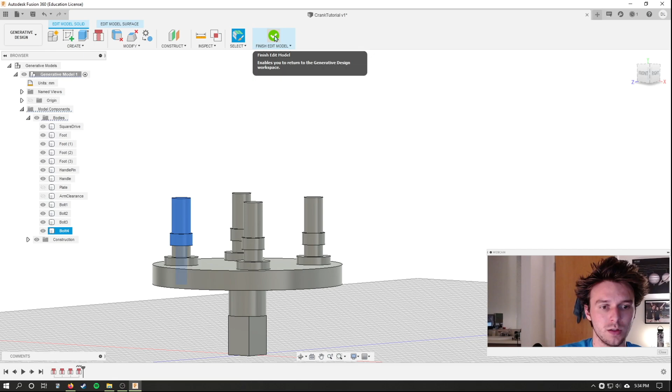Remember, we're just creating anywhere where we don't want Fusion to grow the generative design in. So we're going to go ahead and do finish edit model. There we go, and it defaulted those to obstacle geometries, which is why they're red. That's great because that's what we were going to do anyways.

So let's go ahead and do the rest of our preserved geometries. We're going to—obstacle geometries, I misspoke. So we've already got those selected, and let's drop open the model components and turn on the plate and the arm clearance. So our handle is going to be one, our arm clearance is going to be another, our plate is going to be one, and then down in here, our little square drive is going to be in one.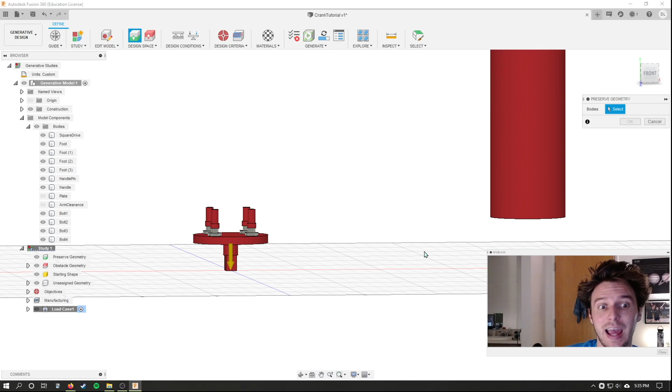So we should have 8 bodies, and you can see they're all red because we don't want it to grow into there. However, now we're going to do our preserve geometries, which are going to turn into green. So we're going to hit preserve, and we should be selecting 5 preserve geometries, and those are going to be each of the little feet and the pin. So we're going to do the handle pin, and then each of these little feet. We're going to hit OK, and you're going to see that those are now green. Let me move that out of the way of the camera. There we go, we've got green right there.

So we've got all of our geometries, and we can turn on the plate and the arm clearance. We've got all of our geometries, and those are all defined as either preserve or obstacle.

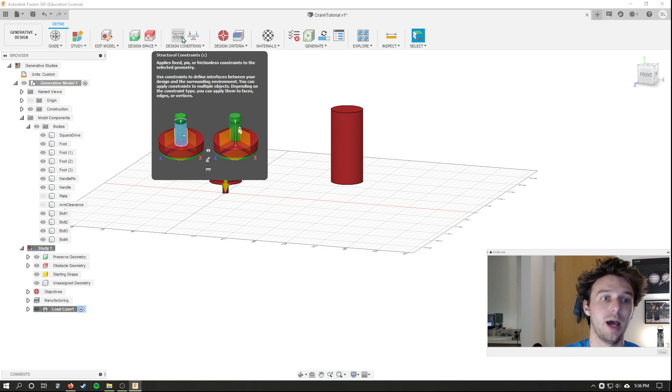Now, as we move along the ribbon, left to right, our next thing is setting up structural constraints. If we read here, it's saying we can set up a fixed pin frictionless constraint to the selected geometry. They can be assigned to multiple objects, but they have to be assigned to preserved geometries, which is really important. So let's zoom in here, and we're going to hit structural constraints.

And let's hide these bolts while we're at it. There we go. And what we're going to do is just define these as being fixed. So each of these are going to be fixed, and that is going to basically create the kind of fixed location of where these are getting bolted in.

So let's do that. We're going to do that by choosing a face, and you can see because we've got the type here. Let's actually hide the square drive, and we're going to do this on the bottom sides of these. There we go, so those are sandwiched on in there.

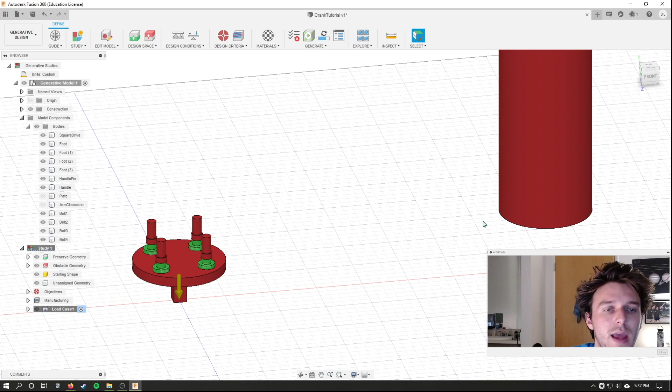Okay, and now we are going to do our structural loads. And remember, these are all kind of appearing in load case 1. So we just did our constraints right there in load case 1. But before we do our loads, remember we were talking about doing different load cases. We want to imagine different situations, which we talked about, like cranking forwards or backwards, putting the handle on, whatever it may be. And each of those are going to be our load cases. We don't want to have to rebuild the constraints every single time, and so to do that, we're just going to clone the load case.

But first, this is the gravity force. Let's go ahead and turn that off because we don't really care about it. Oops, my mistake. We're going to go into loads and uncheck gravity. There we go. And now we are going to create our extra load cases. So we're going to clone load case 1. Clone it again, and just to be safe, let's clone it one more time. So we've got 4. We might not need them all, we'll see. Let's go ahead, and we're still in load case 1. You can see it's activated with that button right there.

And let's put our first force as kind of plopping the handle onto there. So we're going to do a structural load, and it's just going to be a force, and we're going to put it on the top of the pin, and we're going to do this as pounds force. Let's do 10 pounds force. We're going to hit OK, and so now we've got that force there. And then we're going to do our load case 2, so we're going to activate that, and you can see our first load disappeared because that was in load case 1.

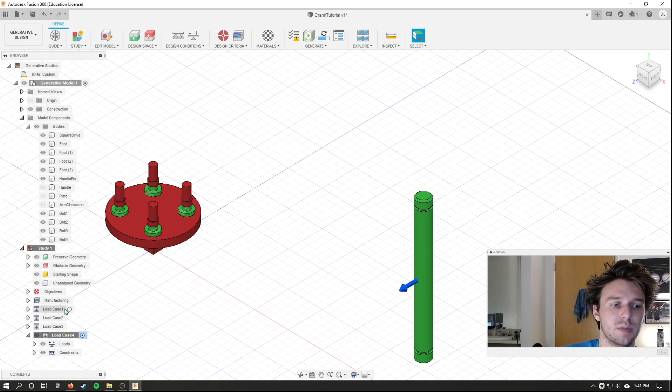And remember, each of these load cases are different situations. So if we had multiple forces, like let's say the handle wasn't free spinning on this spindle, then maybe we would have a torque on that handle or that spindle as well. So then in each of those situations, maybe we would add a torque as another force. We just happen to set it up where each load case has just one force, but you can have multiple forces in each load case, which is great.

But when it computes this, it's going to compute them as each of those load cases could be applying to the final body it's going to create. And remember, it's generative, so it's going to create a bunch of generations of the final body, but each of those should be a solution for each of the load cases. So the final solution should be a solution for all of the load cases, in theory.

So now we're going to go over to manufacturing, and the pieces for the volume is more for calculation of cost, which is only for some of the materials in here. We don't really need to worry about that, so we're just going to leave it there. We're going to turn off milling, and let's say we're just doing unrestricted and additive. And we can turn on all the orientations for additive. Let's say it's some super fancy, I don't know, laser sintering or something like that.

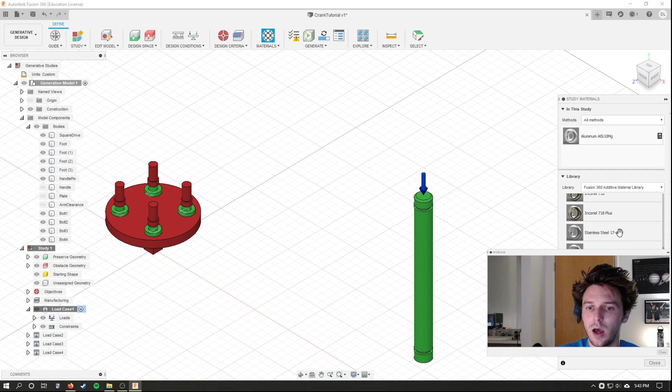So let's go to the additive library, and let's open up some metal. And let's do a 17-4 stainless steel. We're just going to drag it up there, and we've already got the aluminum. Let's go to the regular Fusion library. We'll go to plastic, and we'll try a generic ABS plastic, and we'll add it up there as well. And you can see it's got the cost estimation icon right there. Probably not going to be necessary for us, but whatever. We're going to go ahead and hit close. So we've got our materials selected.

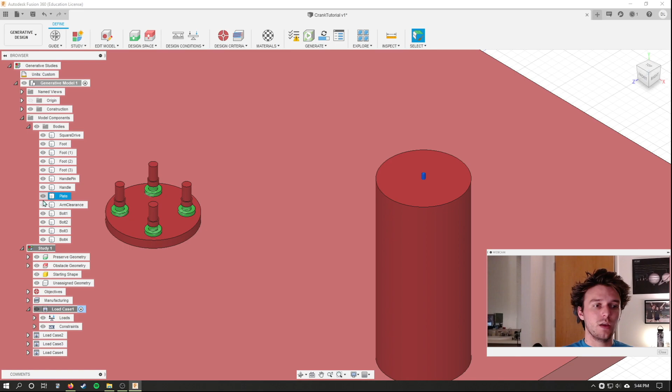And then we are going to look at the pre-check. And the pre-check says, warning, some bodies or components are hidden. If they're assigned obstacle, preserve or starting shape geometry, they still participate in the outcome generation. To exclude bodies from the generation, remove them in the edit model workspace, or don't assign a geometry type to them. But it's just talking about the handle, the plate, and the arm clearance, which we already defined. And so that's all we need to do.

Next, you can do the previewer if you want, which will just show you an estimation of what it might look like. It can be a little bit laggy, so we're just going to ignore it. What we're going to do is then generate the results. So we're going to click on generate. And you're going to see it says it costs 25 cloud credits.

This is why it is important for you to be in your education account, because the education account is what shows Fusion that you have unlimited cloud credits, so we don't have to worry about the cost. And if in the future you're working with a company or something like that, it costs 25 cloud credits to just generate the design, and then it costs 100 to extract those generations from the results. So all we're going to do is click Generate Study.

There we go. It's going to pop up this little window showing us the status. The status is going to be sending, and then it's going to take a pretty long time to calculate. So you may have to do this overnight, go eat lunch, whatever it may be, and then come back. And one other thing to point out is that while it's generating, you may see little previews popping up behind here. Those are explorable if you want, but you have to wait until the entire thing is done, and then you'll be able to see your final results.

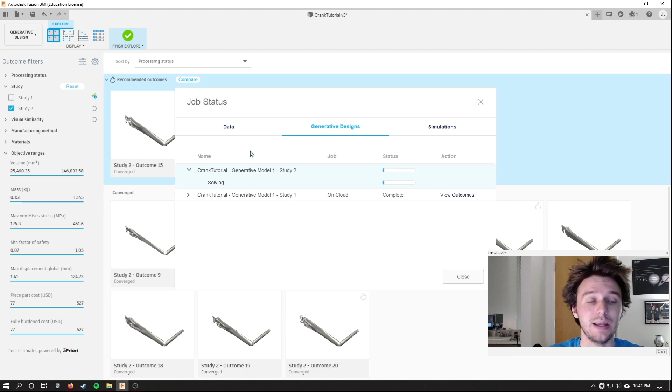All right, so we've let this run for a few minutes, and you can see it still says it's solving, but it's generating outcomes in the background. And I've run multiple studies. You can create as many studies as you want and do different situations with them. However, we can start to pull out models that we like before it actually finishes. So if I really like some of the things it's already creating, and you can see it's still thinking, I can go ahead and take some of those.

So it's going to give us some recommended outcomes and we can look at them. For example, let's look at outcome 15. In outcome 15, you can see we get a preview of what it'll look like. It's showing it in what looks like aluminum, which we can see over here. And we can orbit around, check it out, and examine the structure that it thinks will solve that solution.

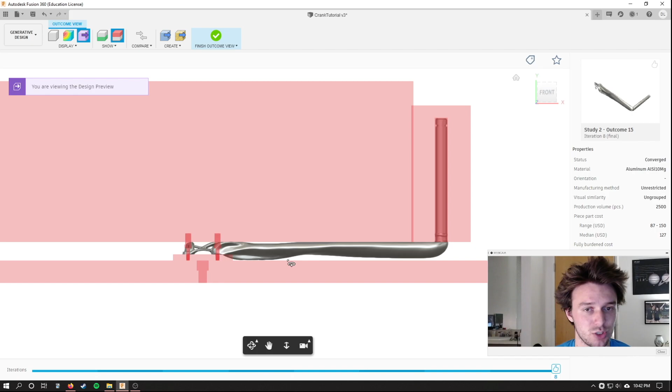And if we want, we can turn on the preserve geometry. Let's zoom out a little bit, look from an orthographic view, and you can see how it's actually growing that structure into there. We can finish this and look at other ones.

For example, looks like 12 might be interesting. And you can see information over here on the right that's relevant to your design. I'm really liking how this one looks just based off of the first glances. You can see it's got a really nice organic shape and it's relatively symmetrical, which is nice as well.

We might want to modify this and make it perfectly symmetrical. However, remember we talked about having that crank stronger in one direction, a little bit less strong in the other direction, and that's probably why this isn't perfectly symmetrical. However, you can see that this is a really neat organic design, and that might be something that I end up 3D printing.

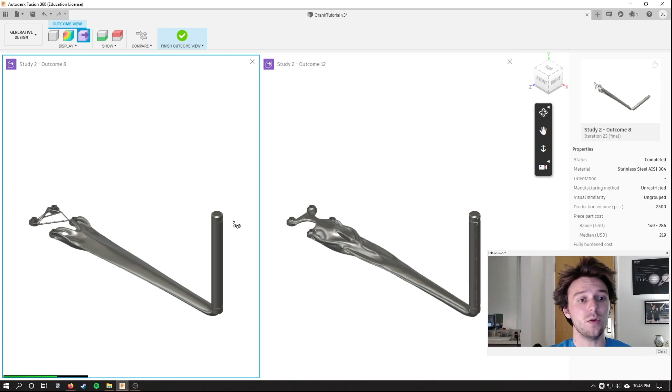We can also compare, and this is a really good function. For example, let's say I wanted to compare study 8 and, oh, I don't know, 12. So I could click on 8, click compare, and click 12, and it's going to show both of them side by side, and it's going to orbit both of them.

And we can look at study 8 as we zoom in on the head here. It actually is only using 2 of those feet. It's not using these 2 over here, which is interesting. Or it's minimally using them, I should say. And so that might be something where we realize, oh, maybe we don't need those 2. But we can orbit both of them in the exact same time to kind of inspect them.

Another thing you can notice right here on study 12 is this one is not actually perfect. It's got some growth inside here, and that may be because of the clearance we left for sliding the handle on, and it was like, hey, I'm going to grow in there. We would actually need to clean that up, and that you can do simply with just using the unite function or the union function and removing that.

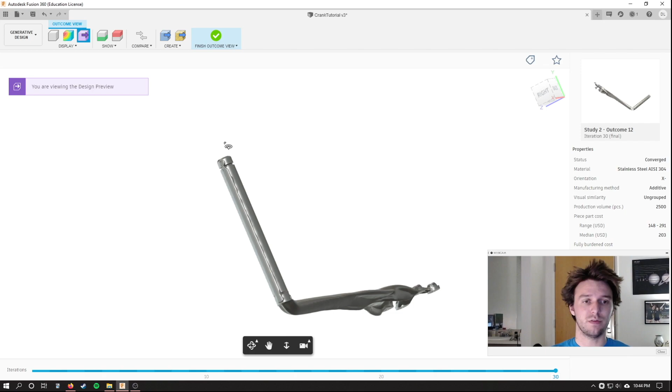So let's say that this is the one that I want to import into my design. So I'm inspecting it, all the information looks good. What I'm going to do is I'm going to click one of these 2 buttons for create, and I can create a design from the outcome, or I can create a mesh design from the outcome.

And a mesh design is usually something that is used more for organic modeling. Might be something you may be familiar with, Blender, for example, or anything like that. But using the design is probably going to be more useful for most of our cases. So we can click that button, and you're going to see it's going to talk about the cost and such. It's going to open it as a separate tab, and it can take a few minutes.

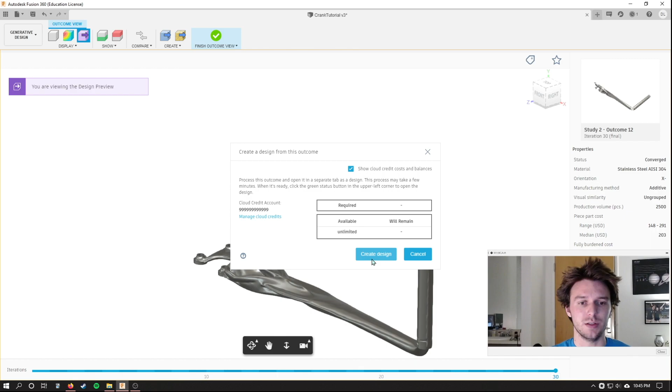If we check this box, we can see our cloud credits and how much will remain. So we have many cloud credits, and afterward it just has a hyphen because it doesn't cost us anything, and that is because we are logged in with our educational account, and that's why it's really important to log in with the educational account. So if this is the one that I want, and I think it is, I'm going to go ahead and click Create Design, and it's going to take some time because it needs to create that design from the cloud. So it's going to do that, and we're just going to let it think.

Okay, so after a few minutes, it has finished processing the outcome, and you can see here there's a button to open the design. So I'm going to go ahead and click that, and we're going to wait a moment while it's just calculating, and it's going to create this in a fully new file. Okay, and there we go. You can see that we have now opened this up in its very own design, and you can see it actually takes the timeline, and it is an editable timeline.

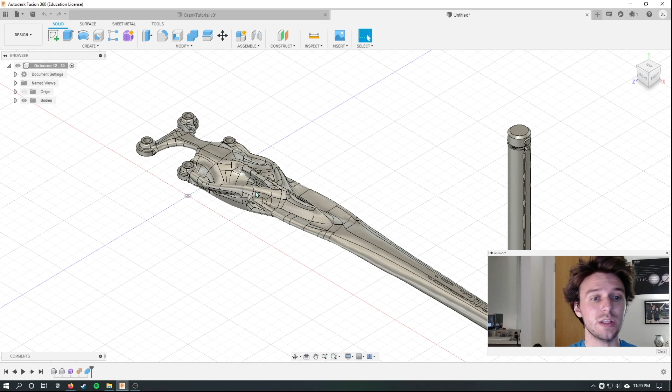So you can go through, edit how it created it, and then we can fully customize this. So if I wanted to make this perfectly symmetrical, if we look from the top, you can see it's not quite symmetrical, but it's pretty close. If we wanted to make it perfectly symmetrical, we could. If I wanted to clean up this edge right here, that would be perfectly acceptable. All these things, and then we can go ahead and use this in whichever ways we deem necessary.

So that has been the tutorial for generative design in Fusion. This is a really neat form of computational optimization, and I hope that you enjoyed it and find it useful.